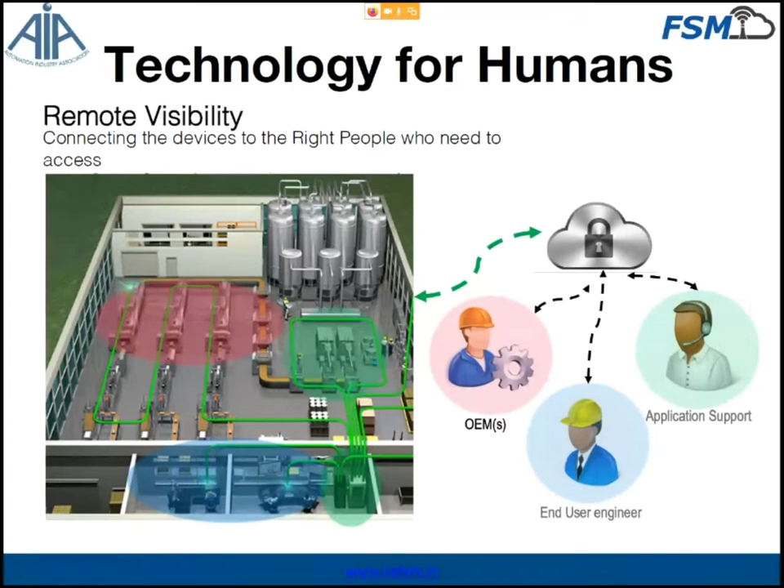And as you can see, there are different stakeholders, the machine builder, the software designer, the maintenance personnel. So that's something, again, which will get elaborated progressively in our technology and solutions sessions. The third aspect is when we talk about, next slide, you will hear a lot about smart manufacturing. And I am not going to digress from that topic.

But again, I want the audience to link smart manufacturing also from the sense that that too is a technology for humans. And the virtues of smart manufacturing, if we look at it from the human perspective, is A, humans are connected. There are no silos between departments. And people from one department know that there is an impact of information from their side to another department and vice versa.

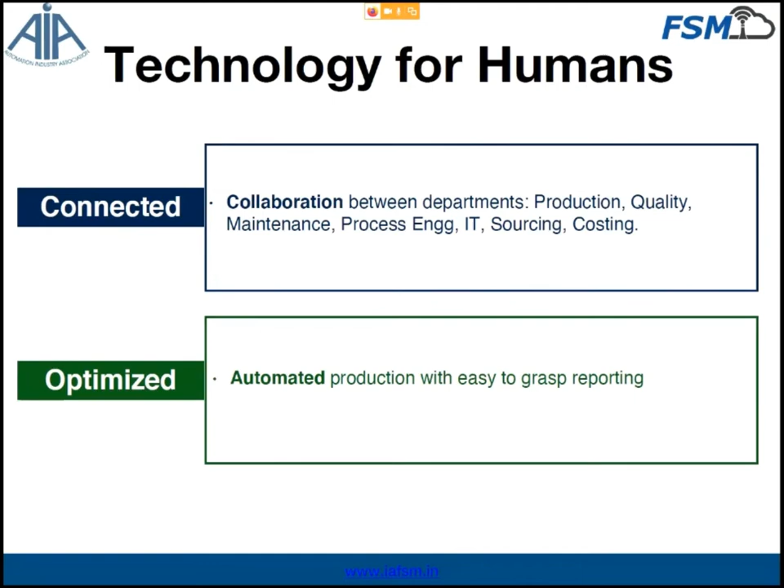High degree of optimization. So optimization means not only optimizing the resources on materials and energy, etc., but also optimizing the energy of the human. So the automated production with easy to grasp reporting is a simple mantra. Next slide.

And then we have three more values, one of transparency. And our belief is that as long as a manufacturer can create transparency for the customer's order tracking, everything else will automatically follow. Proactivity, the ability to have real time sense of safety concerns, of stockout situations, and of machine health. These are again some of the very vital things which are important for humans across all departments.

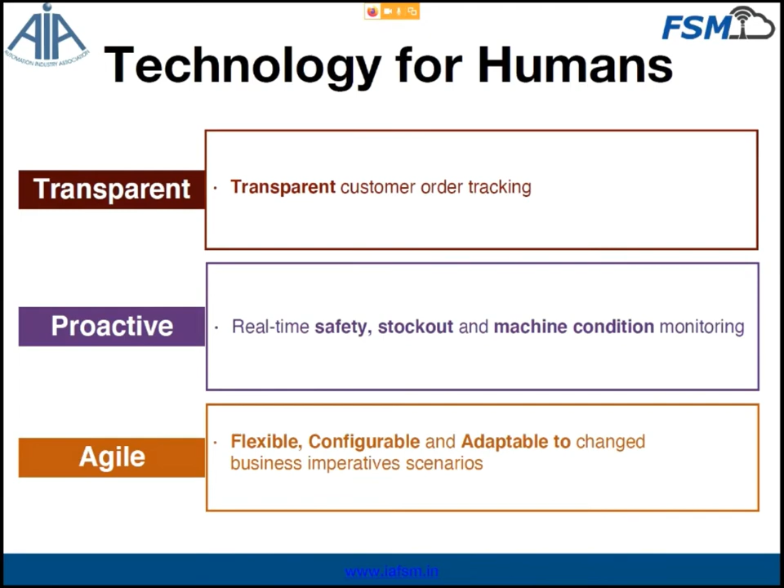And the last and most important in this age of digitalization and the new world that we are in, flexible, configurable, and adaptable to changed business imperatives and different scenarios. So, with that context, let me now move on to the next part of my session, which is the main presentation. My first speaker is Dr.

Ranjit Date. Dr. Ranjit Date is the promoter, the president, and the joint managing director of PARI. We love to call it PARI. It is Precision Automation and Robotics India. PARI is a global leader in manufacturing automation and has a team of over 500 engineers and over 3,000 automated manufacturing solutions deployed around the world. That really is one of the most successful entrepreneurial journeys I have seen in engineering and integrated activity from an Indian person. At PARI, he is responsible for technology and business strategy.

Dr. Date received his PhD in systems engineering from Rensselaer Polytechnic Institute, New York, for his work in robotics and automation. He also holds the master's degree in electrical engineering. He's a gold medalist from the University of Pune and very academic as well. He has authored 12 technical papers and manuscripts for international journals. Dr. Date's professional interests are conceptualizing and developing new technologies and applications for robotic systems, strategies for engineering management, and development of technical skills amongst young engineers and managers.

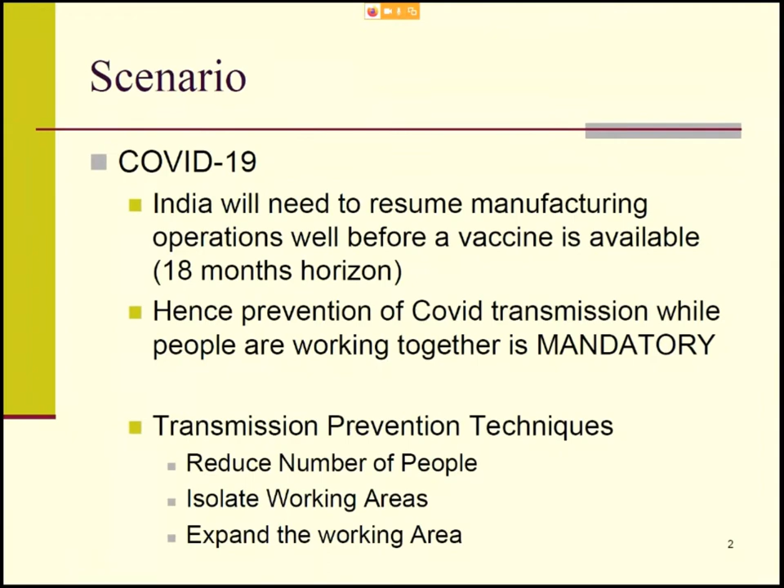And essentially simply expanding this to 2 meters is simply unpractical. I mean, forget about the space availability or not, but simply from the point of view of the level of manual work that will be required to move parts over this 2-meter pitch, or fast takt time operations and so on. Certainly, everything will require a level of automation to achieve this kind of distancing going forward. But even something as simple as that is a challenge.

We look at multiple people having to touch the same part repeatedly. Our serial production systems require people to keep on working on the same workpiece. So essentially, for a virus that spreads by touch and leaves the imprint on the part, literally from that touch, the next operator is going to get that on his hands and so on. So how do you prevent the multi-touch surfaces to which manufacturing processes are highly susceptible?

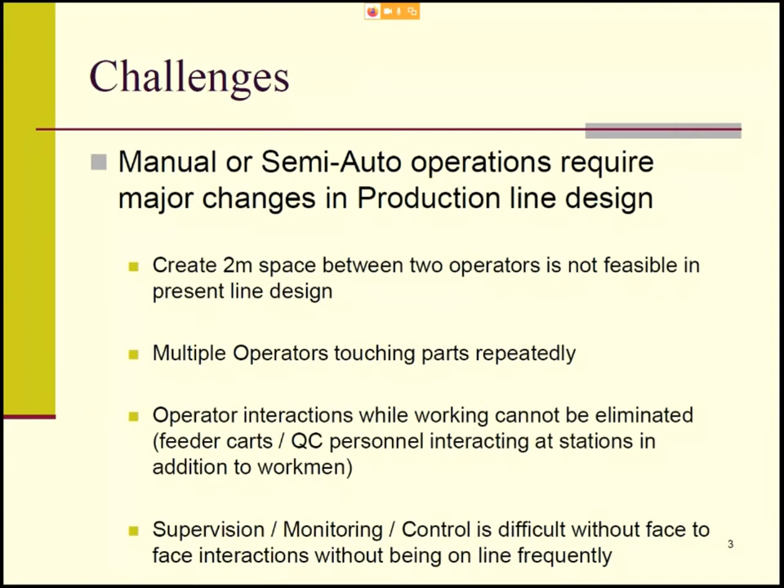So for our supervisors, our managers, our line leaders, how to manage this process without keeping on coming to the floor and interacting with people. That's another challenge. So the challenge of safe operations in manufacturing by limiting this transmission is not easy without deep thought and matching actions. Next, please.

Next slide, please. Okay. So we have been working with our global customers in 3 ways, and these are 3 levels of work. One is, of course, everybody has to have a solution. In less than 1 month, they need to be able to at least start in limp mode. It is not possible that everything will start at 100% efficiency in this time, but nonetheless, not starting at all is not acceptable.

So typically working with 30 to 50% of the manpower, which enables distancing automatically, and yet having 20 to 40% of the capacity producing within 1 month is the typical goal with which people have started opening up their manufacturing lines. And we help them, and I'll give you some examples as to how this is being done.

In the near term, which is basically even before this financial year ends, we would like to make sure that we are running at least a few months in this year at near 100% capacity, yet keeping the same distancing possible. So how do we work with 50% of the manpower with nearly 100% capacity?

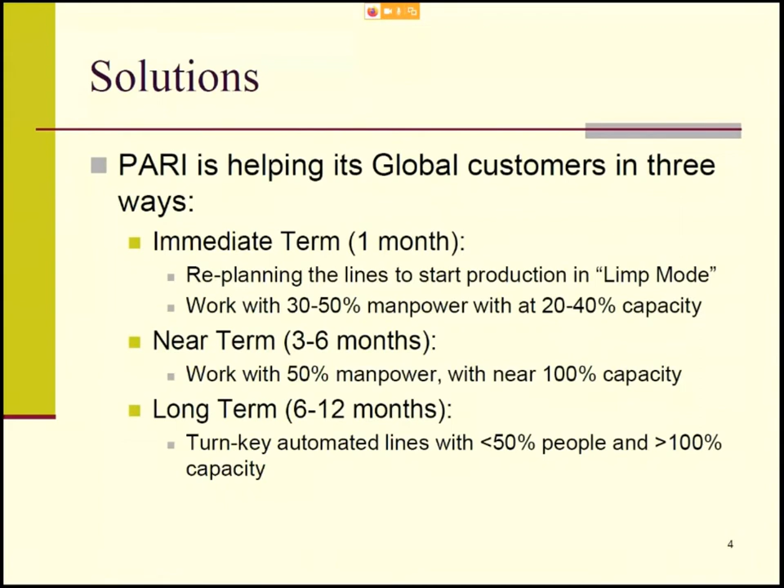And in the long term, the strategic view is how do we sustain this with a reduced level of manpower, but achieve a capacity advantage of 100% or more by utilizing the benefit of automation and remote monitoring and so on, and be a vibrant manufacturing organization that is sustainable, with robustness against pandemics, so that such issues happening again from the next flu season or one more wave next year do not take us down again, right? That's the ultimate goal that everybody is trying to work towards. Next, please.

So in terms of the immediate solutions, and I have a few slides with a few example layouts to explain by examples what each of these points physically mean. But typically the workforce reduction without actually major change in the existing processes requires operator sharing. That basically means that the regular required task done by say 2 or 3 operators is now being managed by a single operator, and therefore clearly there will be a reduction in the throughput expected, but essentially that enables the bridge time in a limp mode to enable ramp up and do the other implementation before actually starting to incur the risk of not having taken these precautions and then having flare-ups and lockdowns.

So wherever possible, relay out the present process, because otherwise in the present layout, if you have one person do the work of 3 people, then simply the walks required back and forth are going to result in a fair amount of inefficiency, over and above short staffing of the work balance, and therefore relayouting wherever it's possible.

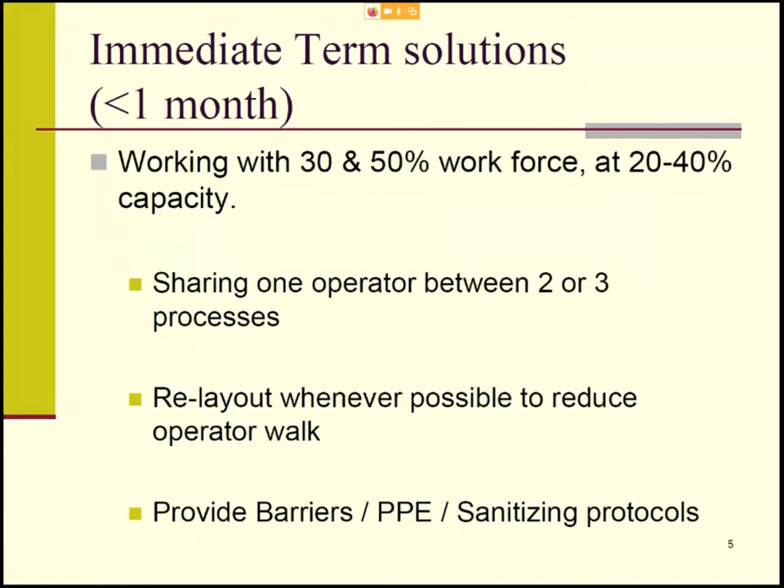In the near-term solution, some interesting technological additions can be added. The lowest hanging fruit actually is the automation of the material handling operations. Traditionally, material handling, whether it is bulk material handling or load unload, pick and place, these have been the lowest hanging opportunities in manufacturing. Globally, people have automated this in any high volume application already. In India, that is not yet prevalent, driven by the cost economics of the people cost versus the cost of automatic equipment.

The lowest now happen to be the loading and unloading of the machines, the robotic palletizing and depalletizing of bulk materials for the line feeds, as well as conveyorized or AGV based line-to-line transfers like trolley and cart feeding of parts, supply to the lines, point of use storage, and so on. These are low-hanging opportunities that can be implemented reasonably simply, reasonably fast, and at a relatively low cost. Many of our customers in India are already utilizing them, and the present situation is only going to accelerate that, and that's the need of the 3 to 6 months time frame. Next, please. Next slide, please.

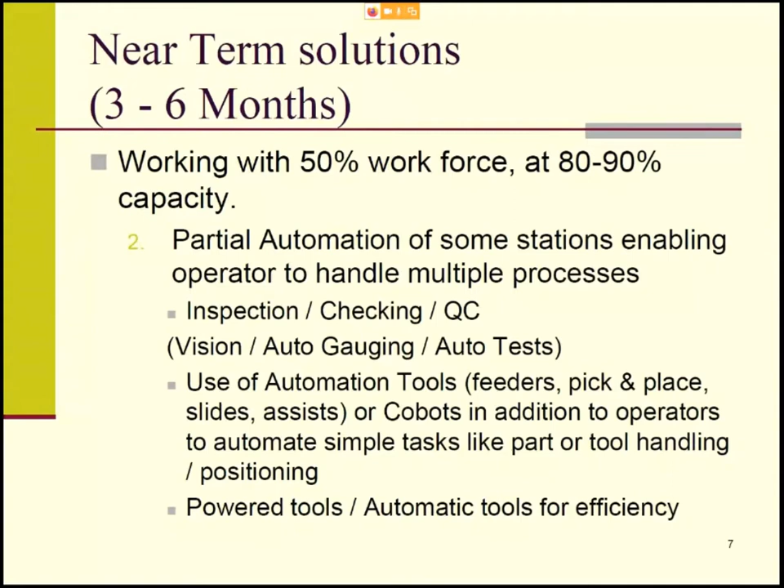And of course, any of the tools that are manual can be automated simply at the tool level, like power tools and assists and grippers, etc., that reduce the workers' manual activity in a particular task. Yeah, next please.

And finally, I think this is an area where a lot of development is happening: remote monitoring of the line through the data and data analytics. First, finding out what's happening on the line at all times without actually having to physically be there on the line. And then the next level of data analytics systems to give a deeper understanding of the issues and opportunities beyond simply an Andon system, which has been a typical way that industry saw the data today. A much deeper data analysis based visibility of the manufacturing operations is possible through remote monitoring and IoT based systems. Next please.

If you get to a 6 to 12 months time frame, that now is your re-engineering of the lines for our life for tomorrow, then we basically are looking at driving this efficiency to its maximum in terms of human usage, minimizing the human usage, but at the same time maximizing the capacity. So the automated lines, semi-automated processes, fully automated quality control, and full IoT implementation that integrates all these station-based solutions ensures that with very few people, the entire line is running productions for you, delivering all the goals like flexibility, quality, just in time, and so on, with very little use of manpower.

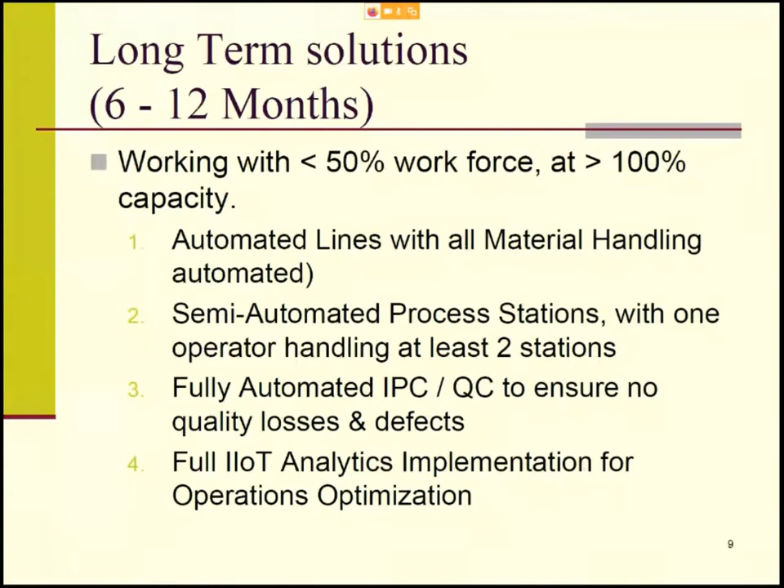And that's the long-term solution that enables us to be ready for the emerging opportunity, and I'll talk a little bit about the opportunity dimension of COVID-19 as well. It is not all bad news. If we prepare ourselves well, it is good news in the near future as well. Next slide, please.

So I'll give you some examples with representative block diagrams. So for example, if you looked at our conventional machining or stamping unit processes, typically we would have a row of operations with people manning each of these with possibly bin feeds or component feeds on their left side. And typically we would have kept 1.5 meters or so of pitch between them. However, when people are able to interact with each other, they are actually able to come as close to each other as 2 feet, or about 0.6 meters. And this is not a good situation from the point of view of repeated exposure to each other.

And therefore, the first thing that people have started doing is basically, if it is possible, simply distance. But typically, it is not possible that your factory expanded 2 times the space and just space these operations out to a 2-meter pitch. So essentially, people have started working with creating buffer zones between people. And if the relayouting of the equipment to higher space is not possible, then have a single person man multiple stations. So although it means a drop in productivity, still there is basically the risk control of making sure that the transmission risk from the virus is eliminated. Next, please.

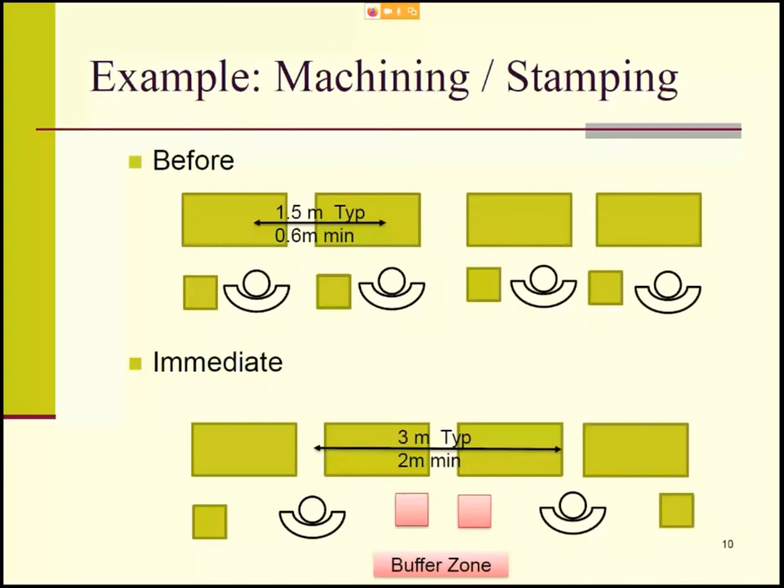Then, of course, this line in the near or long term has the potential of being fully automated through gantry or robotic type loaders, auto quality control systems, and IoT systems, the industrial Internet of Things systems that provide the data visibility and optimization opportunities that I'll be talking about a little bit on one of the slides. Next, please.

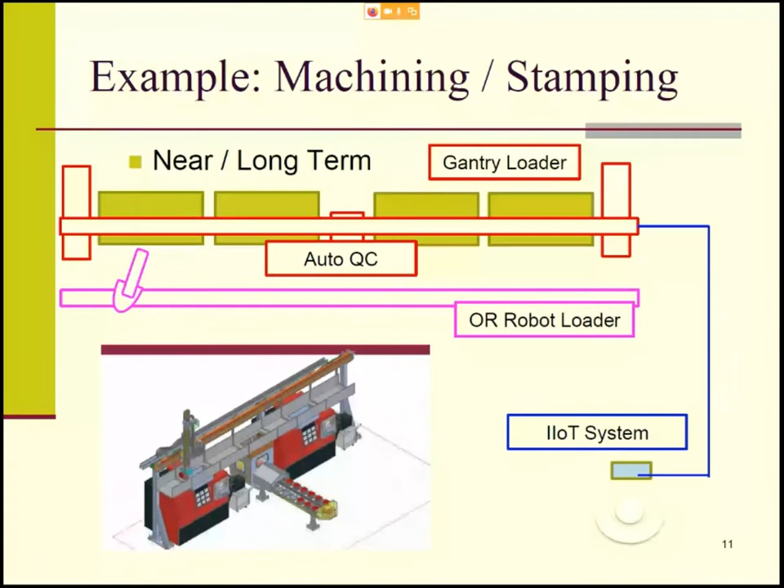Take a typical assembly line kind of situation where you have a conveyorized line with a part moving between stations. And over here, the problem is more acute because typically the assembly lines are structured with a 0.9 meter pitch between the stations, and feeder racks for the incoming parts on the opposite side. This is a typical layout of assembly lines that people would have conventionally been using.

The immediate requirement is to have multiple stations manned by people to generate a 2-meter space, plus acrylic barriers and sanitizing stations between zones, because people working on nearby stations cannot avoid walking close together, yet having barriers between every station is too restricting to allow work. So enabling multiple station work combined with a buffer zone and barriers is one way people are overcoming this in the immediate, tomorrow situation.

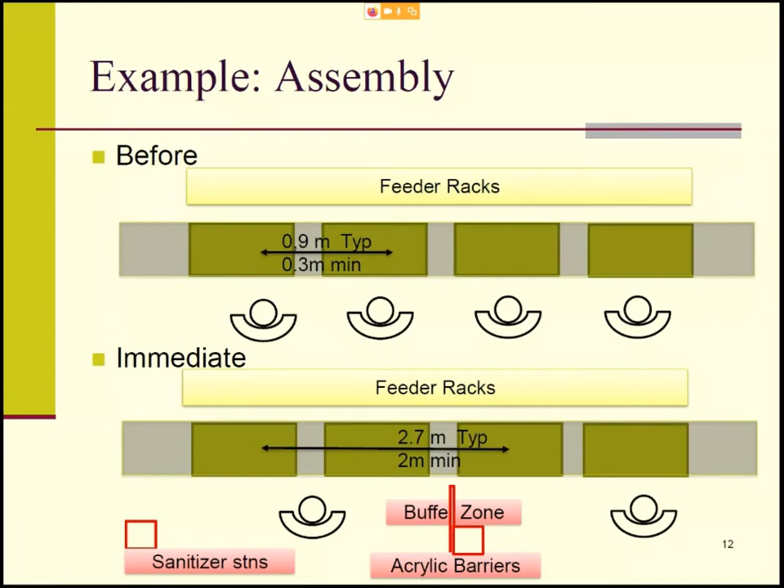However, in the near and long term, having manual stations assisted with auto tooling lets one person do the job of 2 stations without losing productivity. Separating multiple stations on the line wherever possible through auto stations automatically generates the required distance between operators, and AGV type feeders replace part feeds that require manual interaction, automating that portion and reducing further exposure between people.

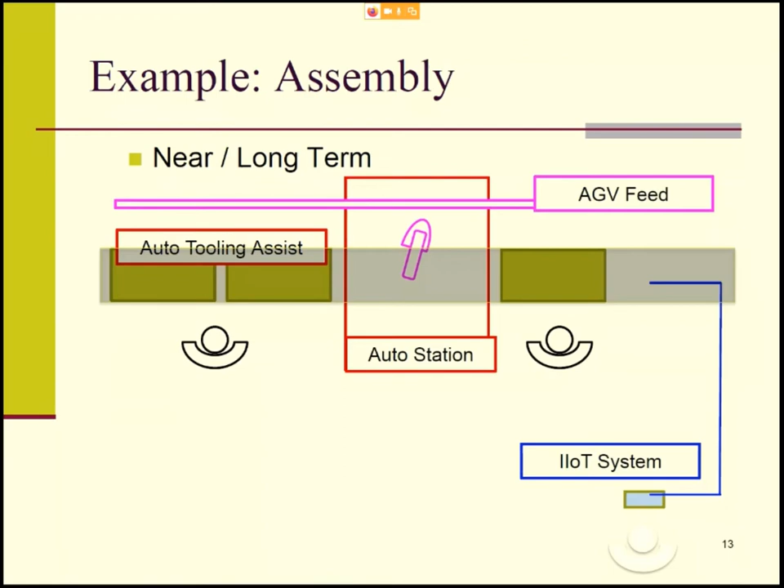And finally, an IoT system with remote monitoring enables supervisory and managerial people to not have to interact regularly with people on the line. Next, please.

If we do this right, two sources of opportunity are emerging, which you can read about daily in business media: the US, EU and Japan have already announced policies to move production out of China. They fear this situation could recur out of China, and given the feeling that China has not been transparent, everyone has become really skeptical. These governments have announced funds offering subsidies for capital expenditure if you move manufacturing out of China into home countries or other Asian countries. That underscores India as a big opportunity.

Secondly, on supply chains, the previous pattern was 70% China, due to obvious cost and volume advantages, 20% in other low-cost regions, and 10% local backup supply near the plant. Now that is being rethought, and our worldwide large customers tell us they will not rely on more than 40% China. They are already moving lines and manufacturing out of China, limiting it to not more than 40%, with the other 40% going to other low-cost areas. India has the potential to be the largest beneficiary. Simply going from 20% to 40% is a 100% jump from this global supply chain realignment.

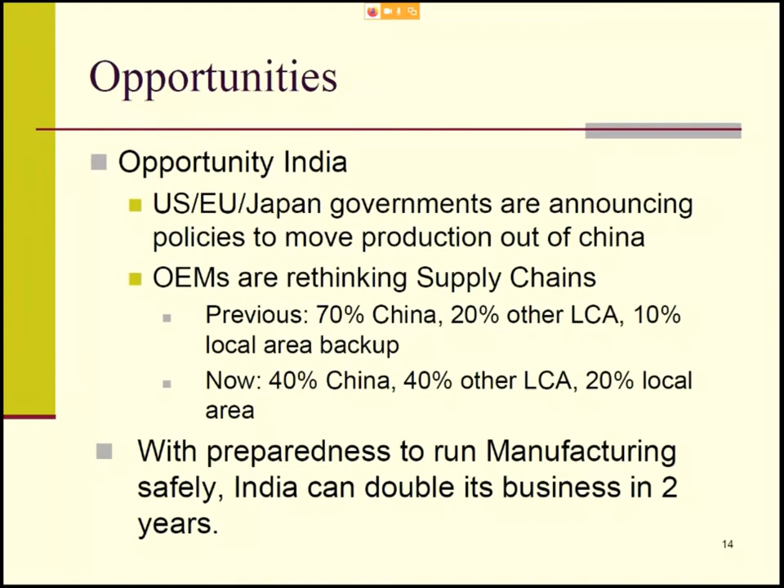Last but not least, IIoT is a technology we are passionate about. About 2 years ago, my company Pari created a division specializing in this IIoT solution, since it's a highly specialized area involving machine learning and more. Linecraft AI is our division generating expertise for IIoT-based data analytics to improve manufacturing optimization. By now we've deployed about 5 large-scale IIoT systems for customers globally, like Ford and PSA, and in each installation they've achieved 7 to 12% direct productivity benefit compared to before, thanks to the data, data-based analytics, and insights the Linecraft solution provided.

And in addition, in the context of the present presentation, the sustenance of the performance is due to real-time and remote visibility, so that if any trend is adverse or anything else requires attention before things go bad, people are able to respond much quicker.

At all these 4 levels that are expected from a solution, the first one being descriptive, that simply achieves the remote monitoring ability to remotely monitor and make the data of everything happening on the line visible remotely.

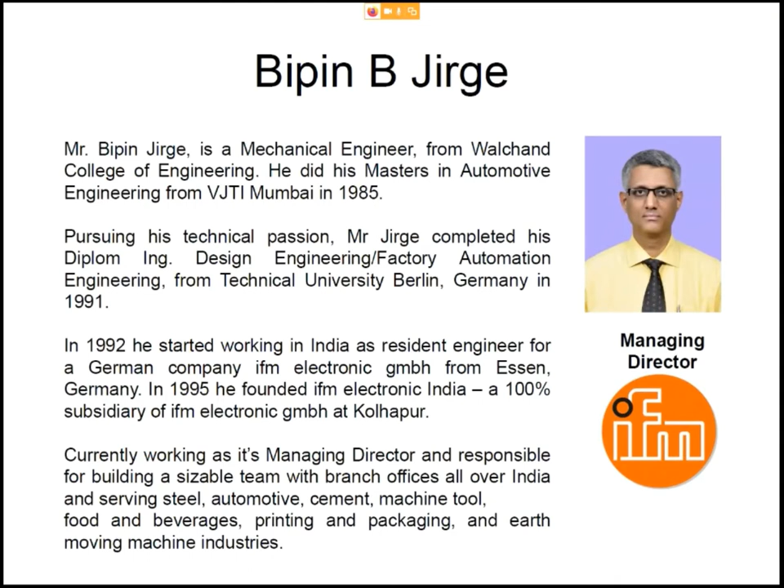Welcome, Mr. Jirge, to this webinar. I know you have a very deep sense of ground realities, and you will be able to take the audience through to the second and most interesting aspect of the observations we had in the initial seminars, which was that in the new normal, everybody is going to be working with reduced people in the factory. And therefore, there will be a need for people to connect remotely. And that is the topic which we have requested you to speak on, the remote visibility for smart machines.

Can you take us through the different, I would say, solutions in terms of affordability and also the ease of implementation, in particular by the SMEs? Mr. Jirge, over to you.

Thank you very much. It has been a great opportunity to listen to the two experts, Dr. Date and Dr. Jha. I also learned quite a bit in their presentations. Thank you very much for this kind of knowledge addition.

Basically, what has been talked about very elaborately, in a nutshell, is that we want to have more production with less manpower and be more productive also. See, Dr. Date gave a very innovative and very detailed presentation on more automation for material handling, so that every man hour utilized is more productive in the factory.

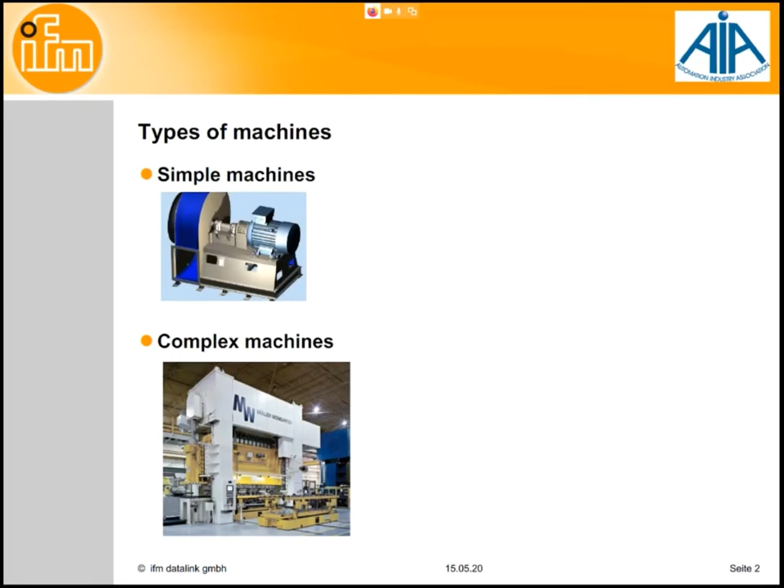So if you see the life of a machine, may I have the next slide, please? Yeah, if you see a typical life of a machine, you install the machine on a shop floor, and after some time, maybe weeks or a month, we do various tryouts, set the fixtures, and start job number one. That's production day one with real line production. And the machine typically lasts, say, 10 years, 20 years, sometimes bigger machines, 30 years.

And during this lifetime, there is a lot of wear and tear of the machine parts, which we address in the form of maintenance. And at the end of the life of the machine, the maintenance becomes so high that it's economical to buy a new machine with better technology and start with a new machine. That's the usual cycle. Can be 10 years, can be 30 years. And there are many types of maintenance, preventive maintenance and predictive maintenance, those kinds of things.

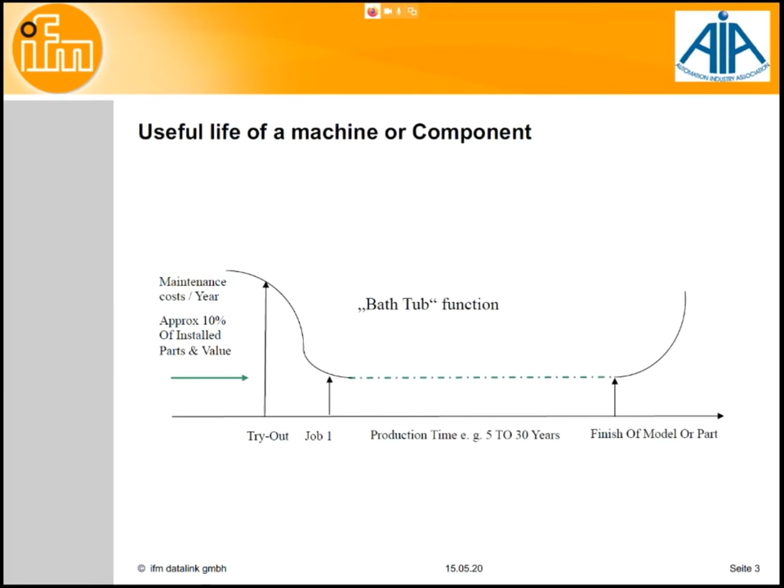So in this kind of machine life, we would like to see how to get the maximum uptime from our machines and increase the overall productivity of the whole production line. Yeah, basically to get more OEE. And there are things which you can feel and touch, but to get the real feel of when the machine is going to be down is the crux of predictive maintenance. May I have the next slide, please?

The simplest measure to take is the monitoring, so that the motor doesn't burn out and I don't have a downtime which is not planned. Generally what we do in routine maintenance, preventive maintenance, we take the motor temperature say every week. Depends on the duty of the motor, but that's what we do. Preventive maintenance. Secondly, we change the bearing of the motor say every year, something like that. So that's the kind of thing we do.

Now, if we do preventive maintenance and time-based maintenances, we incur certain costs. Cost of the downtime, cost of the labor, almost irrespective of the duty cycle of the machine or the motor. The concept here is to do predictive maintenance by monitoring certain key parameters of that machine or machine element, and in a remote way. Why remote? Because you need not have a person visit the machine itself to do the job of measuring the key parameter.

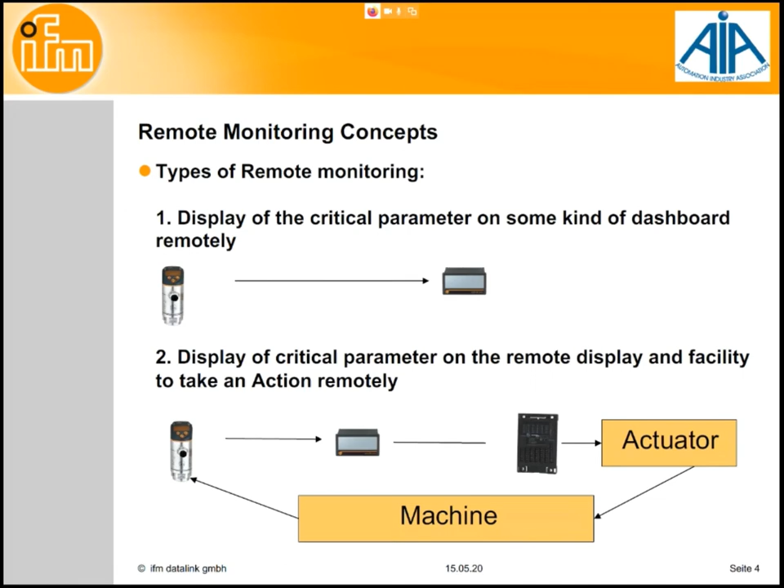The second thing is, if you have a slightly better system on the machine, there is a closed loop. That means you monitor certain pressure, you show the pressure to the machine operator, and then there is a PLC or some kind of controls on the machine which takes the corrective action to bring the parameter back to the safe limits. So this is a kind of closed loop we generally have in many machines. Can I have the next slide, please?

This trend gives us a very simple analysis that my motor temperature, due to some effect from the operating conditions or parameters of the machine, is changing, be it increasing or decreasing. This parameter gives us some indication of something going in the wrong direction. And if it has not yet gone to the level where the machine control will switch off the machine because the temperature is too high, if we can see this trend and predict the rate of rise of temperature, then we can calculate that in maybe 5, 6 or 8 days, this temperature will cross beyond the level allowed for that motor.

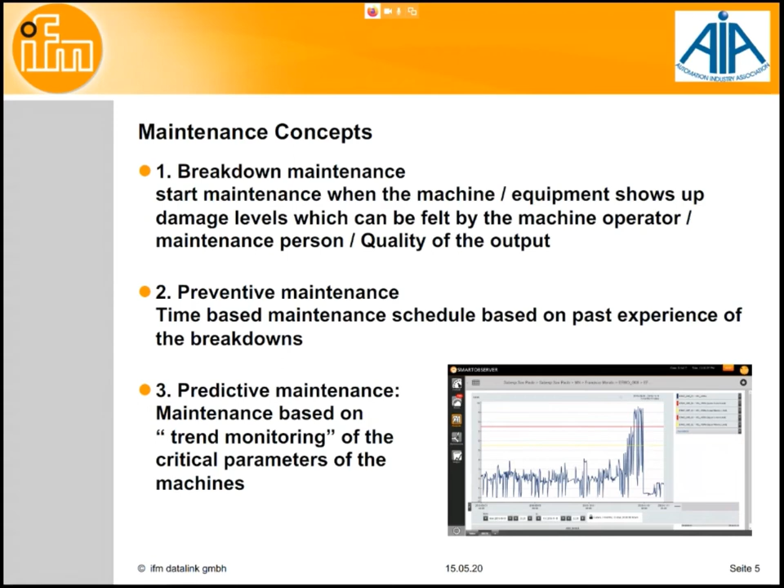We have done some analysis across the range of machines, and the analysis shows that 45% of the machine downtime can be monitored by monitoring just two parameters on the machine: vibration and temperature. I think many of you in the audience, particularly on the plant floor, already know this. You may not know the exact figure, but this is a rough judgment, and this is a worldwide average.

So if we monitor vibration, be it a vibration pattern or amplitude or acceleration, some form of vibration, which depends on the application, and some form of temperature, then we will be able to predict 45% of our machine downtime. That means we can have an advance warning about the machine downtime by just monitoring these two parameters.

There are many other parameters also, like pressures in various hydraulic systems, flow of fluids, that means the lubrication flows. For example, if the oil flow to the lubrication line stops or reduces, we will have a breakdown. That many of us know. Levels of various fluids and positions also. If something is getting worn out, and if something's position on the machine changes beyond a certain level, we are going to have issues on the machine which will result in a breakdown. Now, all these parameters help us to predict the availability or downtime of the machine.

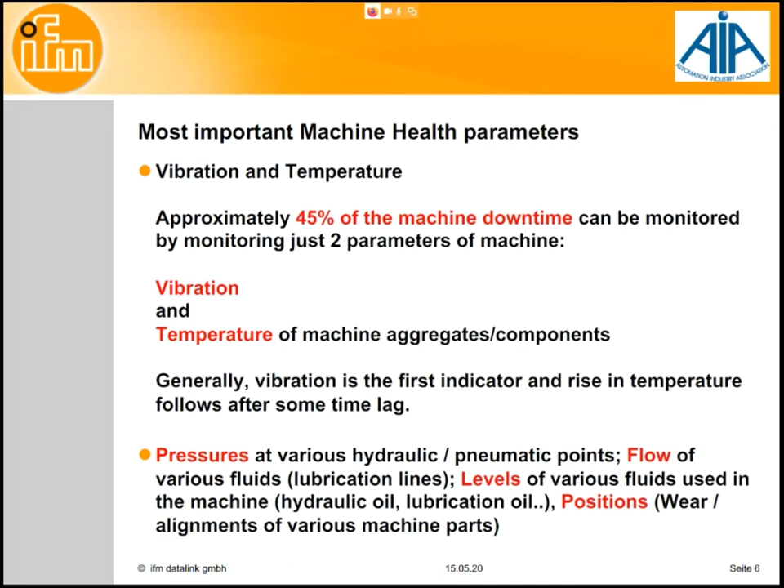A study of a turning machine. These are typical parameters to be monitored on typical turning machines, and the reasons why these parameters are to be monitored are noted here. It's very interesting because these are some very simple things we can do. Nowadays, almost every turning machine has a hydraulic power pack on it. If we monitor the system pressure of the power pack, you generally know the health of the power pack, the leakages happening inside, and whether various clamps and chucks are operating optimally or not. If there is a leakage, this pressure comes down, for example.

Secondly, cutting oil and coolant pressure. If we monitor coolant pressures, then basically you know the filter clogging. Coolant does the job of lubrication and heat removal from the workpiece, but if the coolant pressure and flow reduce, then we have problems. So it can also indicate filter clogging. Then we can look at the filter.

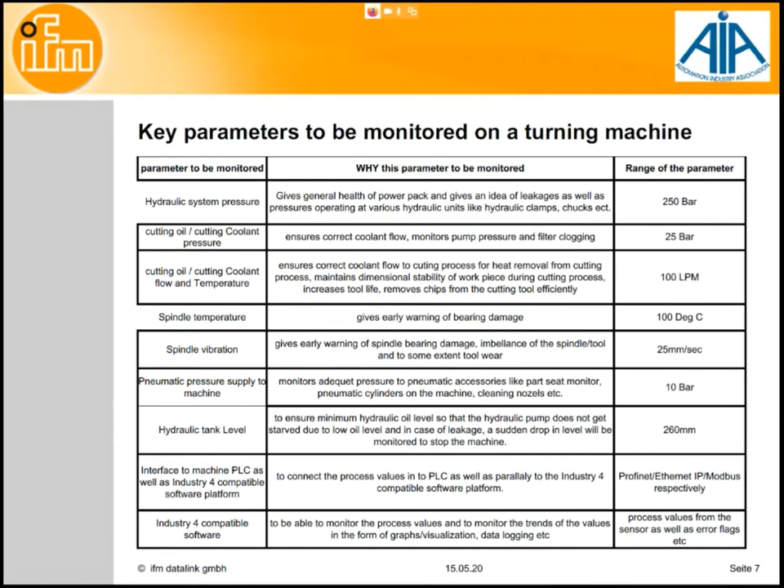So these are some very simple low-hanging fruits which we can monitor, and the trend of these parameters will show that we can really predict something going wrong in the machine after a certain timeline. And in that timeline, we have to react and correct things so that we get higher availability of the machine and less downtime. May I have the next slide, please?

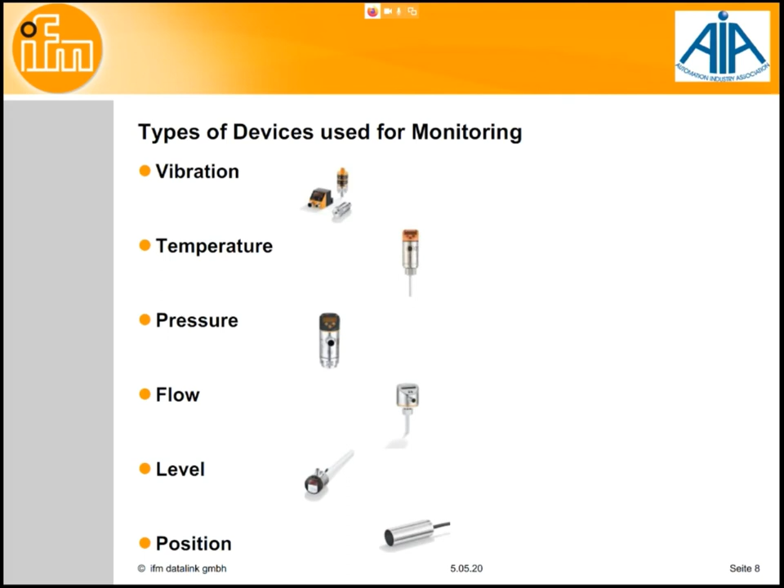Now the question comes, how do you monitor these things? These are some pictures of devices which can be mounted very easily on the machine. A simple vibration sensor, a very simple temperature sensor, pressure, level, and position. A position sensor can be a simple proximity switch, absolutely no problem. A flow switch or flow sensor can be used to monitor the flow of the lubricant or the coolant oil. So these are the kinds of devices which can be used on the machine to monitor the critical parameters. Next slide, please.

May I have the next slide? Yeah, it's already there. Oh, I'm not seeing the next slide. It's the one with the local indicator. Correct. I'm not able to see this. Now it is there. Some bandwidth problem maybe. Yeah. See, now

Once we decide that something must be done to get the feedback of the critical machine parameters, the first question is, especially for small companies, where do I start? And you can name it a bit differently if you want. We call it level 1. The skill level to implement is you need to have a technician or an electrician. And you can do these kinds of simple things in a day, not a problem.

What you can do is install these kinds of devices on those pipes or lines or machine aggregates, and either the sensor has its own indicator or a certain external indicator. And at a set point, it will just drive a tower light of the machine, some indication that something goes wrong. It can be a tower light, it can be any lamp, a simple lamp. So if the temperature of my motor goes beyond, say, 55 degrees, there is a lamp glowing on top of that machine, so that I go and correct it.

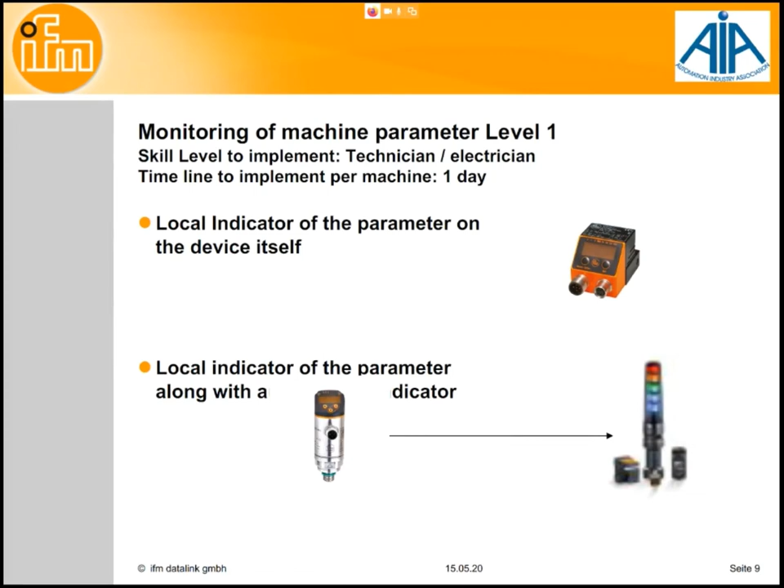May I have the next slide, please?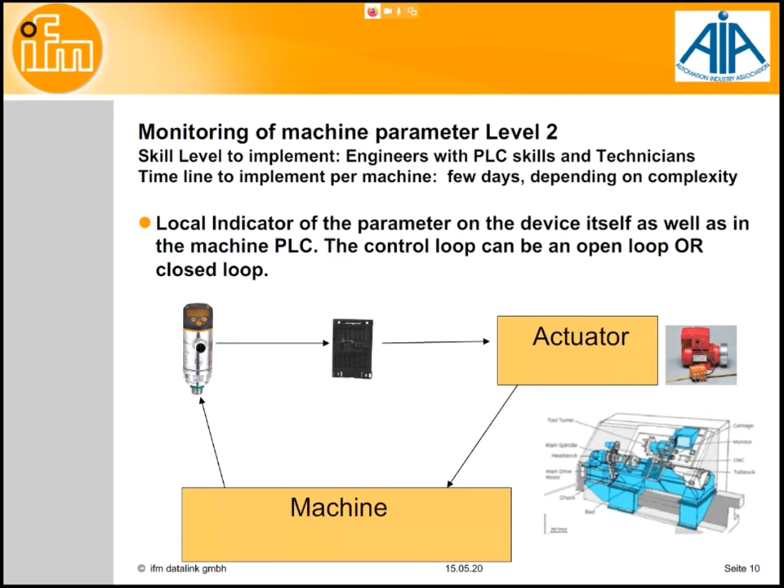So this is a kind of closed loop which can be incorporated in the machine so that the breakdown doesn't happen. You react in time, and otherwise it can also be used to slow down the machine, or to give some warning. And again we get time to react, so that before something really happens which results in breakdown and downtime, we can have an action plan for that. The third level is, can I have the next slide, please, sir?

The third level is going in the direction of Industry 4.0 and data analytics, which Dr. Date very nicely explained. This level actually needs a lot more skilled manpower on the shop floor. You need to have PLC-skilled engineers and IT personnel. The timeline to implement these kinds of things may be a couple of weeks or even a month.

What one does in level 3 is, these devices are anyway connected to the machine PLC, and these devices are connected to some kind of IO-Link master. A few of you have heard of this technology. It's a kind of PLC remote IO card which gives data in real time to two pieces of equipment. One is the machine PLC itself, to operate the machine, and second, it gives the data in real time online to an IT server as well.

And here, various machine parameters can be monitored in real time, and this predictive analysis or data analysis is usually done in an IT domain. That is, the server does this because the server is also getting the data from this IO-Link master. This IO-Link master is nothing but a PLC remote IO card, which is getting the real-time data of various machine parameters from the devices we have seen earlier, be it vibration, temperature, pressure, and whatnot.

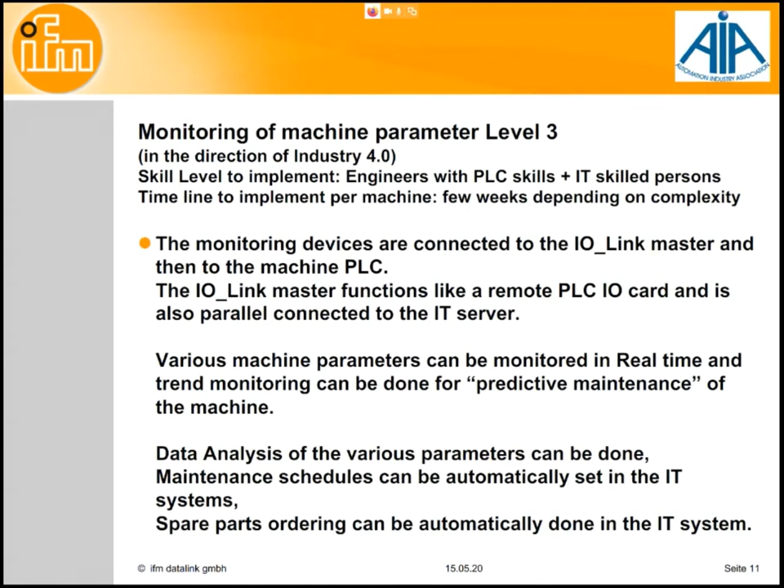The difference between a normal analog sensor and an IO-Link based sensor is that the IO-Link based sensor communicates directly with the IT system. It need not communicate to the PLC, but it can communicate with both concurrently. So the sensor gives data to the remote PLC IO, which is called the IO-Link master. This IO-Link master sends the same data to the machine PLC as well as to IT. And this is a trend going in the future direction.

What we suggest to small machine users is, if we can equip your machines with some devices with this kind of IO-Link technology already, they may not be using this technology on day one or in two months' time. But if the device is capable of talking on this protocol, they can keep adding on and upgrading step by step toward a higher level of machine monitoring. So choose sensors with this kind of IO-Link technology and upgrade step by step.

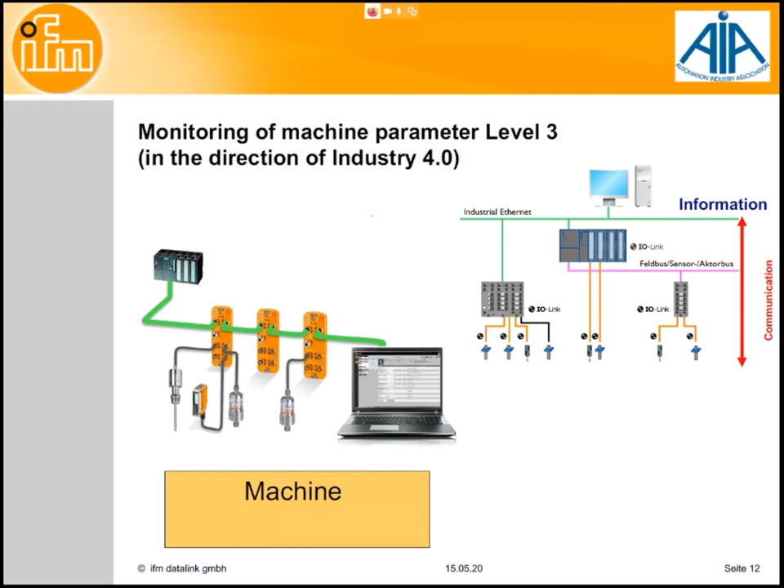All these signals come to a kind of PLC remote IO called the IO-Link master. And this IO-Link master goes to the machine PLC as well as a PC or a server. That server typically runs a database, and this database is used by the big data analytics systems to analyze the data. And this whole small schematic is actually a small start toward a big goal of getting as much availability of the machine as possible.

Yeah, 100% is a tall order, but if we can get, in a real sense, an OEE of anything above 65-70%, that means downtime is one part of it, but overall OEE, that will be a great time for us in the manufacturing industry. I read somewhere that huge automotive companies like Toyota have an OEE of around 65%. Yeah?

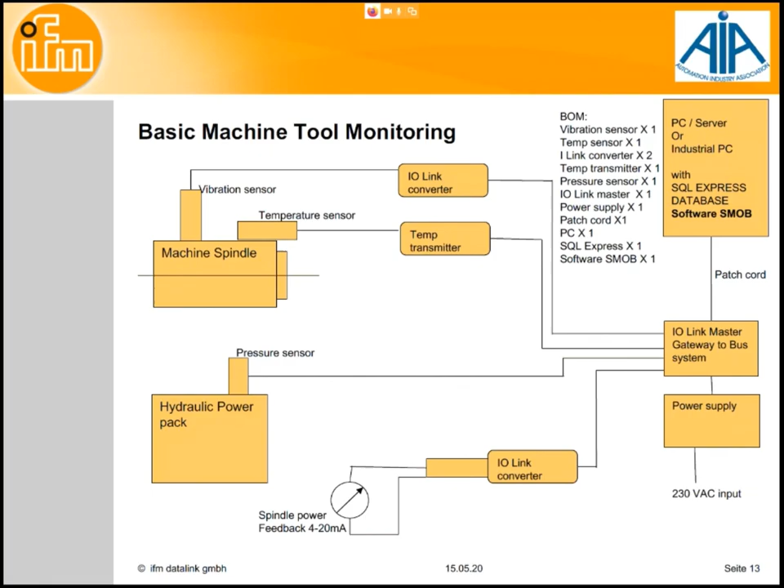Second aspect: nowadays, if there are 100 devices or sensors on a machine, 10 years back, 90 sensors were used to actually run the machine and 10 sensors were used to monitor the parameters. Now that proportion is drastically changing. You have 40 sensors to actually run the machine and 60 sensors to monitor parameters. If you take the data of all 100 sensors to the PLC, you are consuming the PLC's capacity before even taking it to the edge server.

We can do that, but the alternative is: those 60 sensors used only for monitoring need not go to the PLC. This reduces the load on the PLC and its specification requirement. Let the PLC run the machine, and for monitoring, take the data from those IO-Link sensors directly to the server. So basically, you save cost. It's a cost issue. Thank you.

Okay, now we come to the last question, for Dr. Jha. The question is from Abhay Kulkarni: there is a huge cost pressure in the post-COVID scenario and limitation on capex. What will be the foundation's approach for delivering or suggesting solutions, keeping in balance the needs for basic sustenance as well as planning for volume growth?